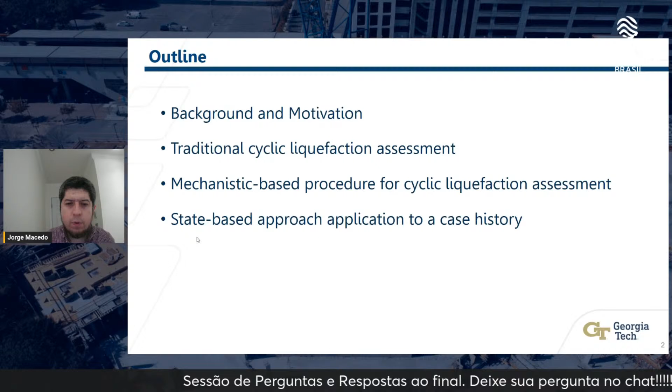So, okay, let's just start with the motivation and with some of the challenges. So one initial challenge is that nowadays, 2024, in the state of practice, the procedures for evaluating static and cyclic liquefaction are contrasting. They are not consistent. So, for example, in Brazil, you had significant failures of tailings storage facilities like Brumadinho, Fundão, and typically those have been associated with static liquefaction, and there is kind of a set of procedures that is used on static liquefaction.

On the other side, on cyclic liquefaction, the procedures are mainly empirical so far. On static they are informed by mechanics, in my opinion. So there is kind of a contrast in terms of how the different assessments are conducted. So that's one initial challenge. Second challenge is that there are limited case histories for intermediate materials. With intermediate materials, I'm talking about, for example, mine tailings or silts. I'm gonna be showing you some figures later that are kind of making a case for that.

So in that context, there is also uncertainty in applying traditional approaches that have been developed for natural soils, in most cases sands and silty sands, to intermediate fine-grained soils or waste materials, for example, mine tailings. What I'm trying to tell you here is that most approaches for cyclic liquefaction have been formulated for clean sands or sands with some fines content, and the application of those approaches to other scenarios for which they have not been explicitly calibrated needs to be considered carefully.

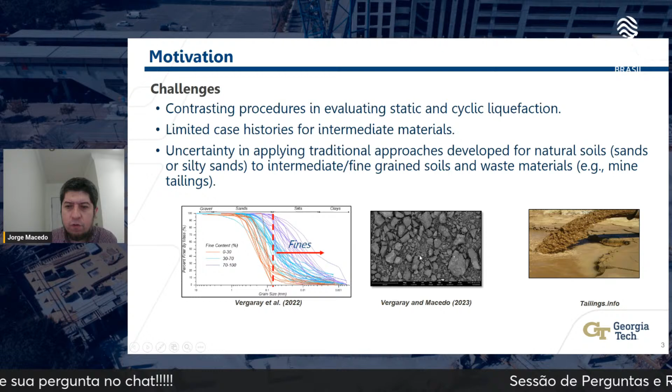So now, let me just show you what is the traditional approach. Please pay attention to this chart over here, and hopefully you can see my mouse. It's an empirical approach where engineers were going to the field after an event, after an earthquake, and there was a documentation of liquefaction manifestation. If liquefaction was observed in the field, typically through ejecta, so if there is a manifestation of the material that was beneath the surface going out to the surface, that was classified as liquefaction, and those are the red points over here. And in the opposite case, where there was no manifestation, it was characterized as no liquefaction, which are the white circles over here.

Now, the y-axis over here is the seismic demand. So this is CSR. It stands for cyclic stress ratio. The equation is over here, as you can see. You can think of that as being directly related to PGA, and it is also scaled by the level of total stresses and effective stresses. And rd is just a depth scaling factor that is accounting for flexibility. Okay, so bottom line, the y-axis is telling you the demand. And the x-axis is telling you the resistance. So how resistant is your material?

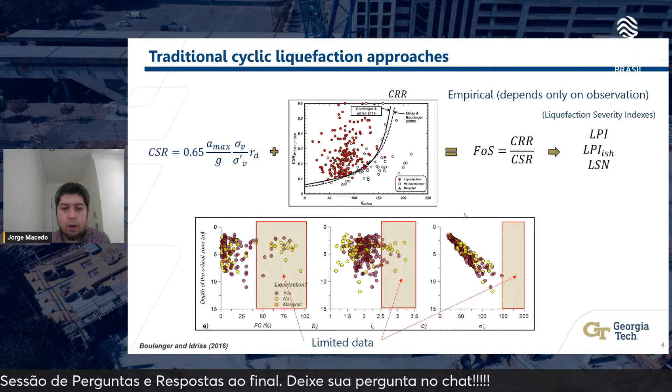So now, in terms of the liquefaction severity indexes, as I mentioned over here, I did show 3 examples. And this is how they are typically calculated. The liquefaction severity index is going to be a combination of the safety factor and a weighting function. And the weighting function is changing with depth. So, for example, LPI is the liquefaction potential index. When it is used, F, this function over here, is going to be nothing but 1 minus the safety factor. And the weighting function is going to be 10 minus 0.5 Z, where Z is depth.

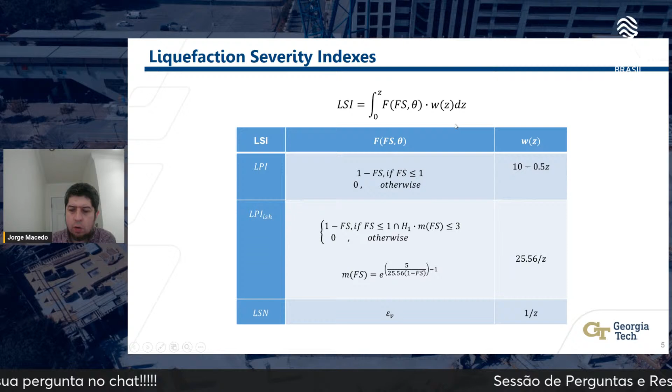So similar to LPI, on LPI-ish, which is relatively newer, you have just a different function for F. And then when you go to LSN, you will be having a different function for F. In that case, this is the volumetric strain. So the concept, as I mentioned, is that you are combining safety factors with a weighting function. That's all that's happening. So now, I'm showing you here a bit more data to keep making the case of the limitations of the empirical approaches.

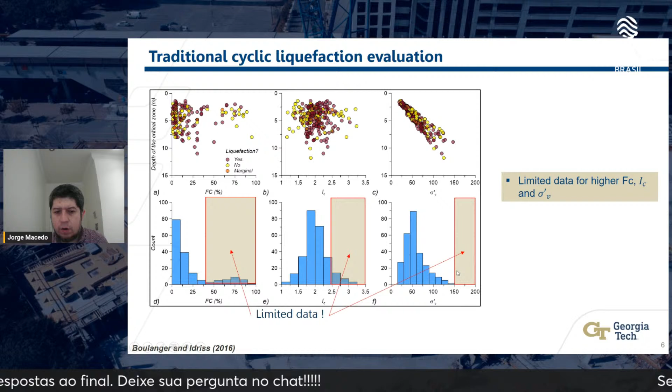Here I'm just showing you the same figure as it was before, but now I'm showing you some histograms. And take a look at the histograms for the large fines contents over here. There are significantly scarce cases compared to lower fines contents. Likewise, when you're looking into I sub C, you see only a handful of cases for I sub C values that are higher than 2.5, and the same for stresses. So same message as in the previous slide. I'm just showing you the distribution with histograms over here.

Now, one approach that we put forward in the papers that I was mentioning, and I'm going to be showing you some of the details in the next slides, is to use a state-based approach. In that state-based approach, the demand, CSR, remember this is just representing the demand, is the cyclic stress ratio. This is not changing. It's exactly the same, as you can see. It's just scaling up PGA, total stresses, effective stresses, and also the rd factor. Now, what we are changing is how to estimate CRR.

And the case that we are making is CRR can be estimated based on the state parameter. And the state parameter can be estimated from mechanistic properties. Like, for example, here I'm showing you the normalized Q, that will be the normalized tip resistance, the normalized BQ, that will be the normalized pore pressure from the CPT, Gmax, that's just the maximum shear modulus that is calculated also from, if you are doing a seismic CPT, you can get that from the seismic CPT.

MTC is just the critical state stress ratio. N is a volumetric coupling, and you can get that from triaxial tests, for instance. Chi is just the state dilatancy scaling. You can get that also from triaxial testing. And then upper gamma and lambda are the slope and the altitude of the critical state line, and P is just confinement. I'll be talking a little bit more about all of that information. But the idea here is that you can estimate CRR from a state.

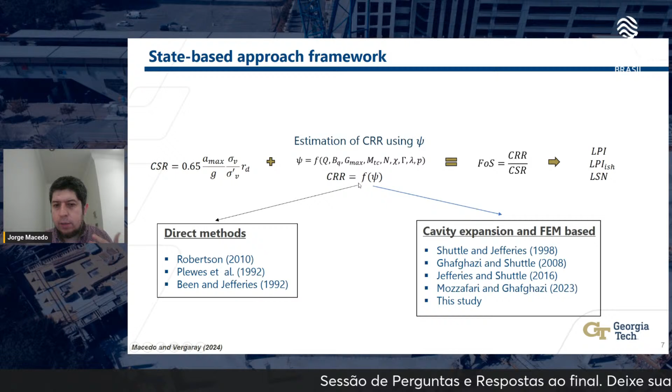At the end of the day, the estimation of the state parameter is posed as an inverse problem. An inverse problem meaning that you go to the field and what you measure with a CPT is going to be the tip resistance and other measurements, and what you really want to know is the state parameter. It's pretty much how you invert the measurement from the CPT into a state parameter. So anyways, once the CRR is calculated, now you can proceed as usual and calculate your safety factor, and you can calculate your severity indexes as well. Okay.

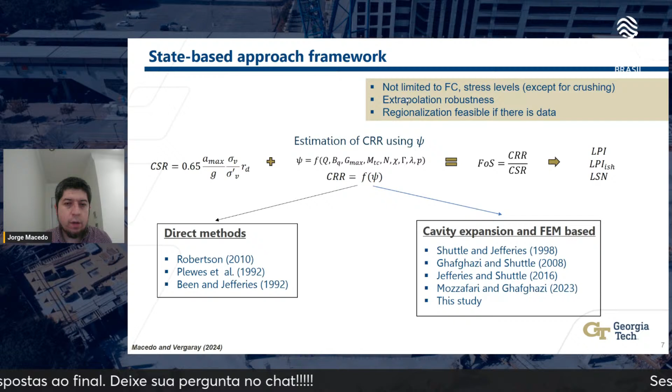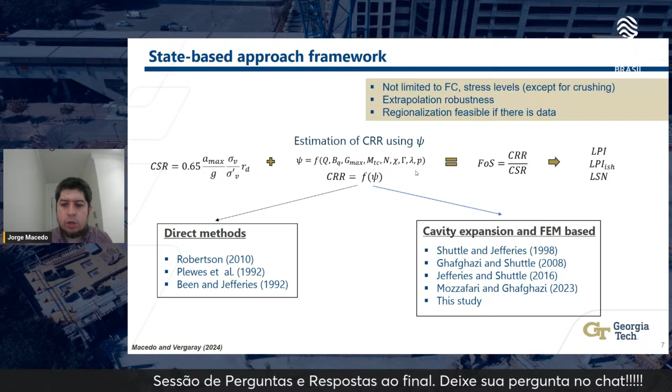So now some clarifications here: this approach is not limited to fines contents and stress level, assuming that we don't have crushing, because we are capturing the mechanistic aspects of the response through the mechanistic parameters that we are using. The extrapolation is expected to be more robust because, again, we are relying on mechanics. It's not just empirical. And you can also have regional versions of the procedure as far as you have data. I will be showing that a little bit more in the next slides.

So now, one of the key aspects of what I have been talking about is the CPT inversion. That means that you go to the field with your CPT, and as I mentioned, you measure the sleeve friction, you measure pore pressures, and you measure tip resistance. But from these measurements, you really want to know a state. You want to figure out what is the state parameter. So there are different ways of doing that. For example, you can do cavity expansion.

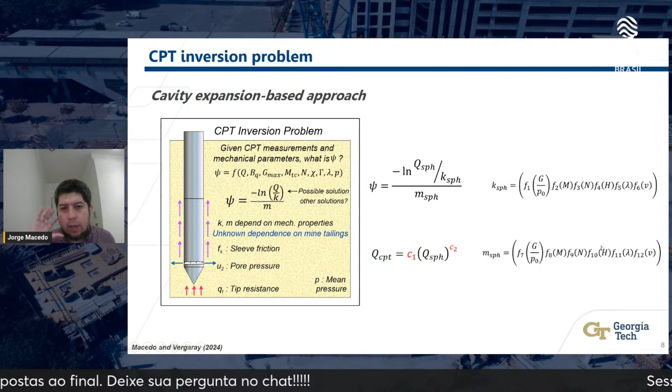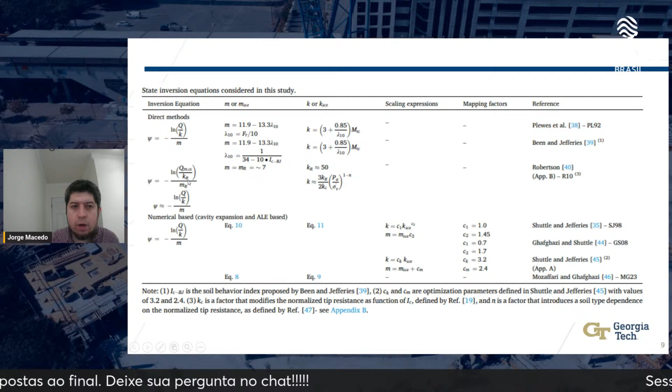Now, in terms of inversion procedures, we document them in our paper. So I suggest you take a look at our paper if you want to see the details. But typically, they are going to have these forms. For example, this one over here is the form for Plewes, Been and Jefferies, and Robertson. And we have some alternative forms. In our paper, we also discuss that the Robertson procedure can also be showcased as an inversion problem, where now the K and M are given by these equations over here.

Now, let's talk about the mechanical parameters, because so far I'm telling you that we are going to be doing a CPT, and we need to back calculate the state from the CPT. For that, we need to have mechanical properties. And those mechanical properties are common, I would say, for static liquefaction assessments. And the case that we are making here is that we can use them for cyclic liquefaction now.

So, for example, the critical state line: you do a set of triaxial tests, and then you evaluate what is the final or ending condition that is representative of a critical state condition, and you can get a critical state out of it. And typically, you can have a linear or a curved relationship; that's more a flavor rather than something really very relevant, I would argue. It depends on the level of stresses you are dealing with, of course. And there are fundamental aspects on why you're getting curvature, but that's a different discussion.

So then you have the stress ratio at critical state, which is nothing but the stress ratio when you are getting to the critical state condition, as the name suggests. You have the state dilatancy parameter, which is just scaling the state with the maximum dilatancy. Remember that if a soil has a more negative state, you are going to have a dilation that is higher. The minus sign here is because of the convention in soil mechanics that expansion is negative, and because of that the dilation is negative. And then you also have stiffness related properties where you have, for example, the shear modulus being related to the confinement through different functions.

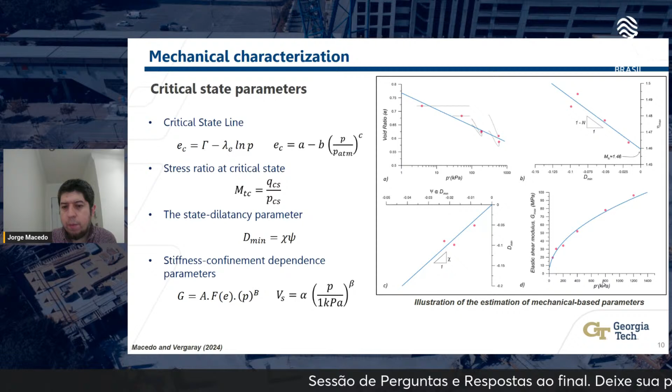So far I have given you the ingredients that we are going to be using, okay? We're going to be using CPT to estimate the state, and to estimate the state, we're going to require mechanical properties. Now, we need a framework to evaluate how well our different models are performing. That can be done using machine learning, and this is what we did. There is a technique in machine learning known as the receiver operating characteristic curve.

And the idea is that, let's say you have these two distributions here, and then there is going to be a threshold to separate the data in one category, where a category can be that liquefaction has manifested, from another category where liquefaction has not manifested. And then, for that threshold, you are going to have some cases that are true positives, in other words, cases where you saw liquefaction and the method is actually classifying that as liquefaction. But you're going to have cases that are false positives, meaning that they are actually in that distribution here, but your threshold is classifying them, I would say, not in the correct category. So you will have true positives, false negatives, and true negatives.

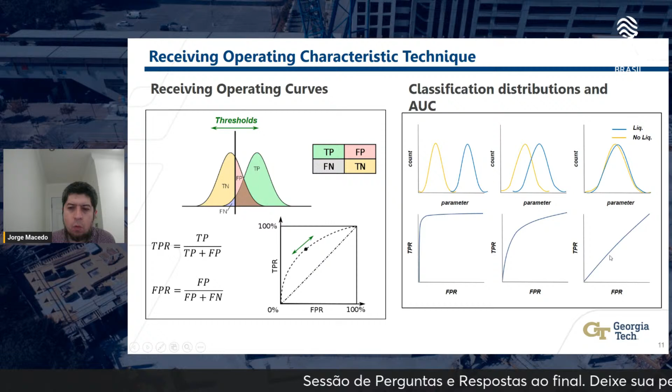And then if you define the true positive rate and the false positive rate, a figure like that can be created where the y-axis is the TPR and the x-axis is the FPR. And if you plot the data here, the closer this curve is to the upper left part, the better your classification threshold is working. So, for example, if your classification is separating two classes like what I'm showing here, hopefully you can see my mouse, that will be a pretty good separation, because we are seeing almost no overlap between them, and this curve is going pretty much to the upper left. Now, if it is doing an okay-ish work, it's going to look like that, and the curve is going to move in that direction. And if it is not able to really separate the cases, the distributions are going to look pretty much the same, and this curve is going to look like a linear one-to-one line, okay?

So now what we have done is to evaluate the framework that I have described using the Canterbury earthquake data. So let me give you a little bit of background on that. During 2010 and 2012 in Christchurch, New Zealand, there was a sequence of earthquakes. And that was quite interesting and quite unusual, because you had a bunch of earthquakes within a relatively short period of time. And in New Zealand, that caused significant liquefaction damage. And because of that, and other aspects as well that I don't have the time to dive into, there were a lot of seismic, and not only seismic, but CPT investigations as well.

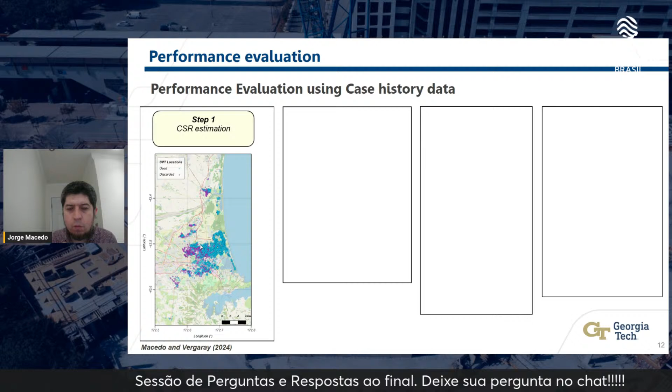Indeed, what you are seeing here on that map, each dot here is a CPT. So you can see that there is a lot of data here. So in order to evaluate the framework that I was describing, we did go to that database and we looked at every single CPT over there, and we decided which ones we're going to be using forward for the assessments that I'm going to be showing.

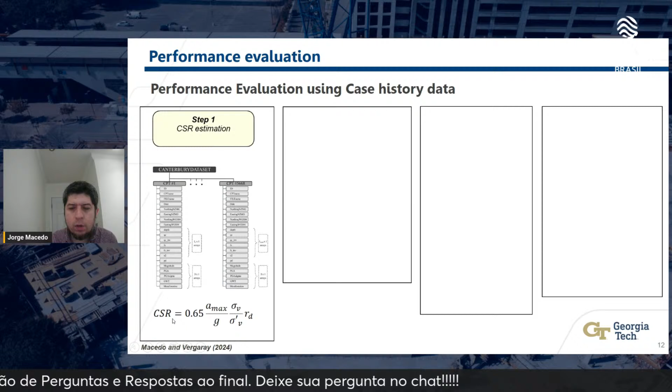Now, what we did is for each site we calculated the safety factor profile, and then we calculated the liquefaction severity indexes as well, which again, remember, is just a combination of the safety factor profile with different weighting factors. And we did that for all CPTs that I was showing on the previous figure. And in that step, we calculated LPI, LPI-ish, and LSN indexes. And then we were getting distributions.

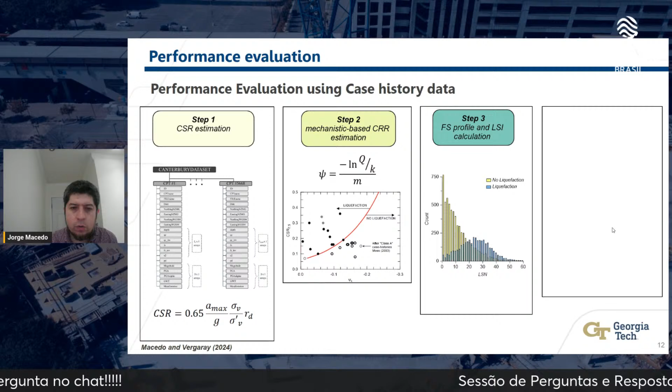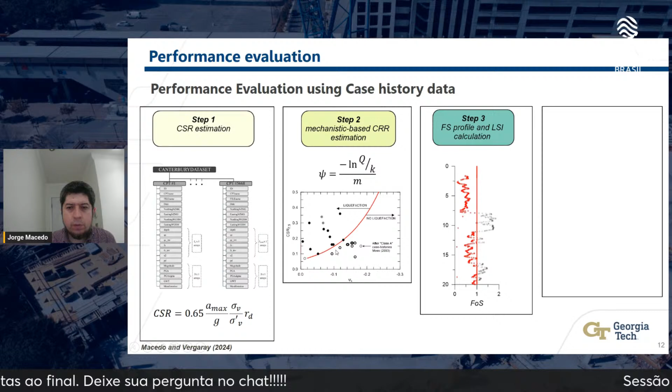So now let me show you some of the results. And remember that we are using a variety of procedures. Just to remind you about that, let me highlight this again. Remember, direct methods, we have this, and cavity expansion ones, we have these ones over here. So now, in terms of direct methods, they were working. Oh, by the way, I am also showing the Boulanger and Idriss 2016 procedure over here, which was used in New Zealand extensively.

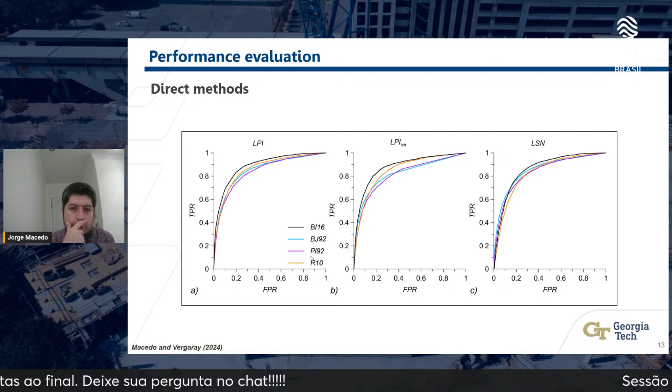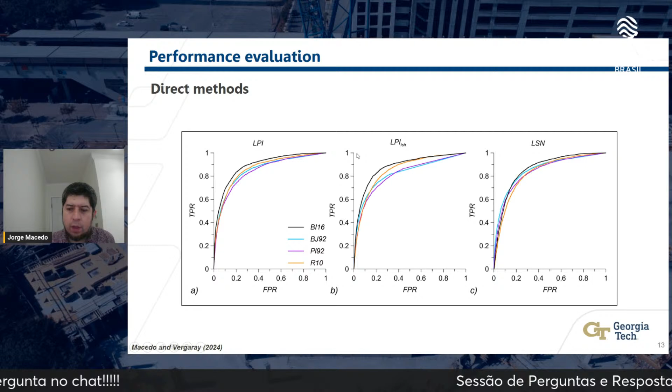And I'm showing you over here the direct methods. Those methods are just estimating a state from the CPT directly, and then we're using a state to estimate CRR. Remember that, okay? So the performance is, I would say, similar in all cases. LPI, LPI-ish, and LSN are just working fine from that perspective, because the curve is relatively close to the upper left range over here.

And now when we looked into the cavity expansion-based procedures, we started to see some differences. For example, here, and again, the Boulanger and Idriss and the Robertson 2010 procedures are shown over here. Those are traditional procedures which are expected to work properly, because those have been calibrated with case histories in New Zealand.

In the other cases, the purple curve over here and this one over here are cavity expansion based approaches, and then the red curve over here, that one is a curve based on finite elements. Okay, so something I should have added over here is that it's not only cavity expansion. Also, we have a curve that is based on finite element simulations.

So the takeaway from these plots over here, remember the better performance is when these curves are going to the upper left. So the takeaway is that the cavity expansion procedures, in terms of performance, are not as good as the others, as you can see, because those are closer to the diagonal. And in particular, this curve over here, which is from Shuttle and Jefferies, was not really performing well on New Zealand.

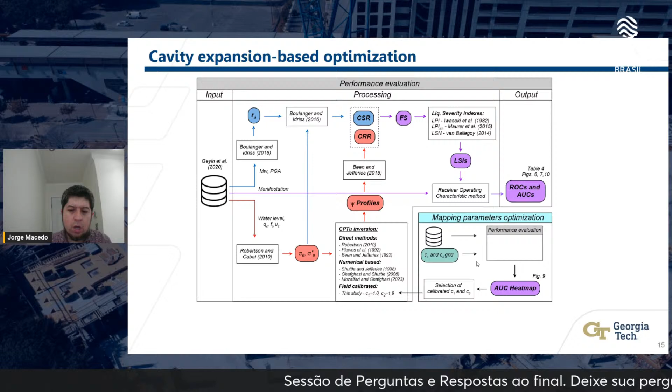And for one of them, that is the cavity expansion, we tried out different C1 and C2 values. And remember, C1 and C2 are the constants that are mapping the state parameter that you are getting from cavity expansion into a field-based state parameter. So we conducted a sensitivity study, changing those C1 and C2 values to different realizations to create a map that's going to look like that.

And we created maps for different liquefaction severity indexes, starting with LPI, moving into LPIish, and then going into LSN. And what you are seeing here, the x-axis is C1, and the y-axis is C2. And remember that those factors, C1 and C2, are used to scale the state parameter that you get from the cavity expansion simulations into field values.

Something else that you are seeing over here is the sensitivity of different combinations of C1 and C2. For example, the top figure over here is showing a C1 of 0.1, and how the different cases are changing when you increase the C1 for a constant C2 value. And the different histograms are showing how well the calibrated parameters can separate liquefaction from non-liquefaction. So we repeated that many times, and we created those contours over here.

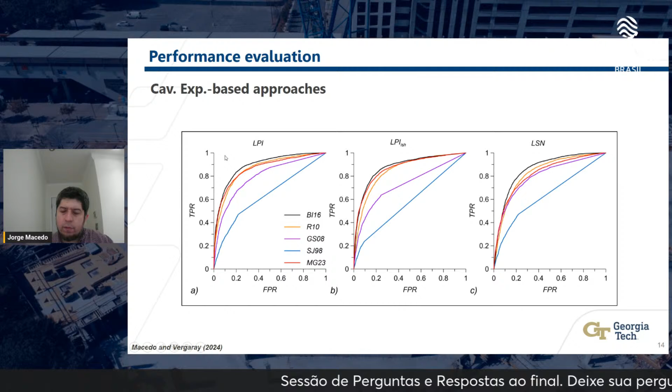And what you are seeing here as colors is the area under the curve, which is, if I go back here, the area under those curves. So if those curves are closer to the upper left part, the area will be higher, and the method will be performing better. So what we are going after here is pretty much the highest values here.

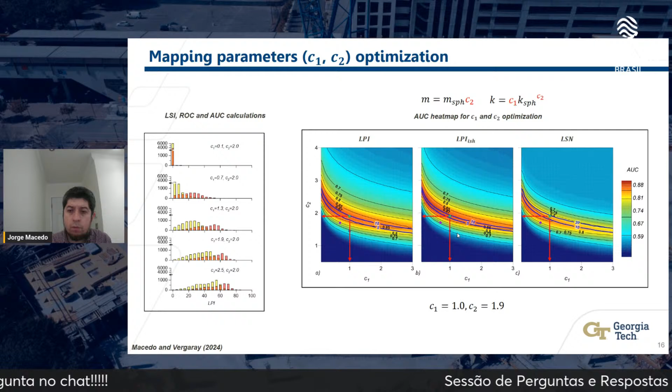And in that particular case, we found that this combination was providing us a high AUC value, and by the same token, it was giving us an LPI value that is consistent. Here, for example, we are in the range between 5 and 15. It's consistent with values that have been observed in the field, which is good. So we did the same for the other cases, and in that manner we constrained our C1 and C2 values. And for those constrained values, we repeated the procedure and calculated the receiver operating curves.

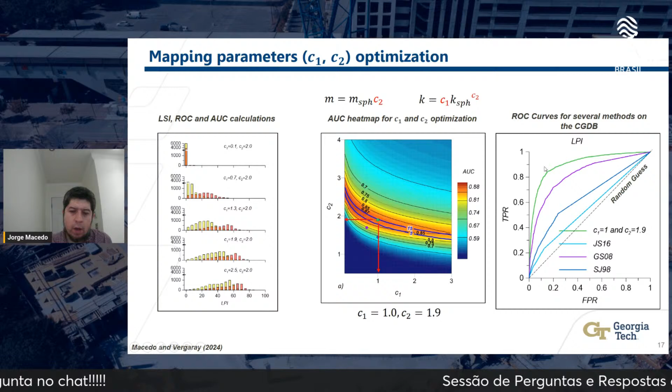That's what we are kind of going after. And then, we compared over here how our updated inversion procedure, or cavity expansion-based inversion procedure, was working in the context of the Boulanger and Idriss 2016 and the Robertson 2010 procedure, which have been formulated for natural soils. I have to highlight that. And I'm showing you also this procedure here that is based on finite element simulations as well.

The reason why we're showing that procedure here is because when you have a cone penetrating, cavity expansion is going to be only a proxy for the penetration. If you're doing finite elements, that's going to be a better proxy. Of course, it is still having limitations as well.

So the takeaway from this is that the proposed framework is as robust as the Boulanger and Idriss procedure for New Zealand. However, the mechanistic framework can be extrapolated to different conditions that we believe the Boulanger and Idriss procedure has not been formulated for. For example, cases that are outside the database, and that would apply to any empirical procedure in general, because an empirical procedure is based on the data for which it has been created.

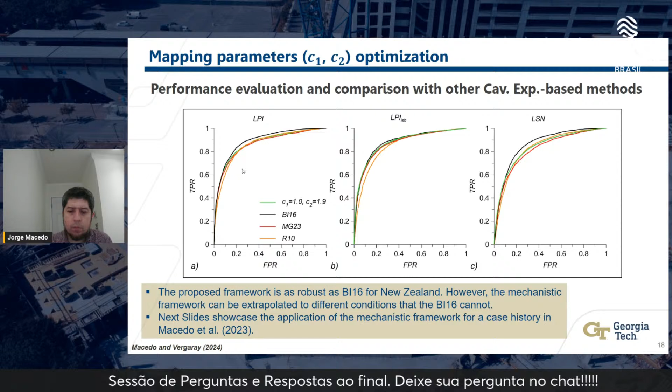So in that context, in the paper, and in the case of New Zealand, we were not recommending those procedures over here. We were favoring either the procedure based on finite elements or the procedure we recommended to be used, which is a calibrated cavity expansion. And of course, the empirical procedures are working also fine in New Zealand, because to some extent, they have been calibrated with significant data from New Zealand. And the same story applies for the other liquefaction severity indexes.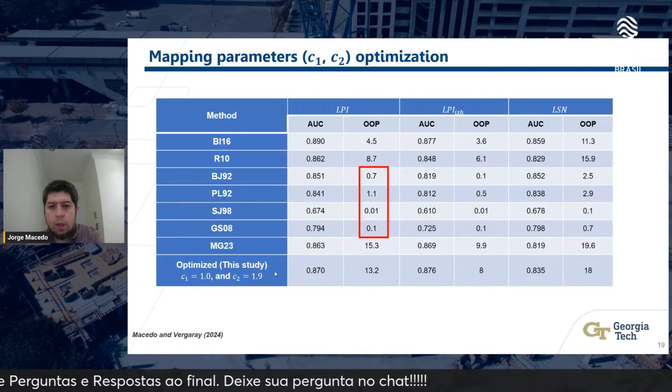With the added value that you could actually use the procedure for a site-specific case study. For instance, if you have a tailings dam where you are assessing cyclic liquefaction and you have already done the testing for static liquefaction assessment, you can use that information for the assessment of your particular facility without relying on a procedure that has been formulated in a general way using data from many, many locations.

Now, we applied the procedure to a case history in California, the Harbor Bay Business Park liquefaction case history. And this is a very nice case history. It is published in one of our journal papers. And I'm saying that it is nice because we had CPT data before the earthquake and also after the earthquake.

And we have CPT data since approximately 1984, and CPT data has been collected periodically over there. So we have data from 1984 to about 2019. So that is more than 30 years of data approximately, if I'm doing the math correctly. So we did look into all of the data, and we learned a lot of things.

For example, how the earthquake is actually changing the density of the materials that you have there, and many other things. So just to give you a general idea of the stratigraphy on that site, the CPT traces look like that. This is the tip resistance, this is the pore pressure, this is the normalized pore pressure, this is the friction ratio, and this is the undrained strength.

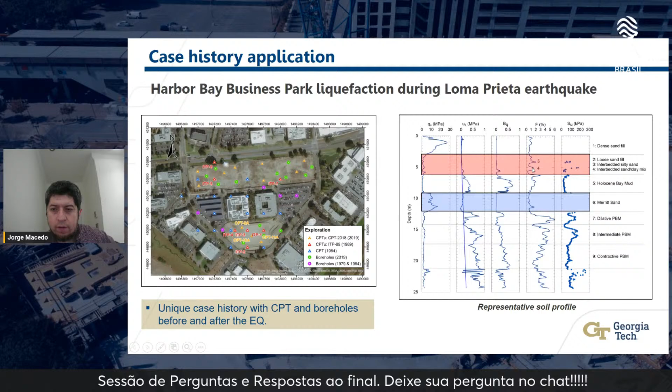So as you can see, there is a dense sand fill over here, which is followed by a loose sand fill and interbedded silty sand, and also interbedded sand-clay mix over here. You have a Holocene Bay Mud over here. There is the Merritt sand here. There is a dilative Pleistocene Bay Mud that is showing up over here with some variations. So in general, we focus on these two units for our assessments.

And here I'm showing you some comparisons of CPT responses before and after the Loma Prieta earthquake. The Loma Prieta earthquake happened in 1989, and as you can see here, it seems that there was a movement from left to right for that particular material, the loose sand fill over here. Meaning that after the earthquake, the tip resistance seems to have changed by that amount over here.

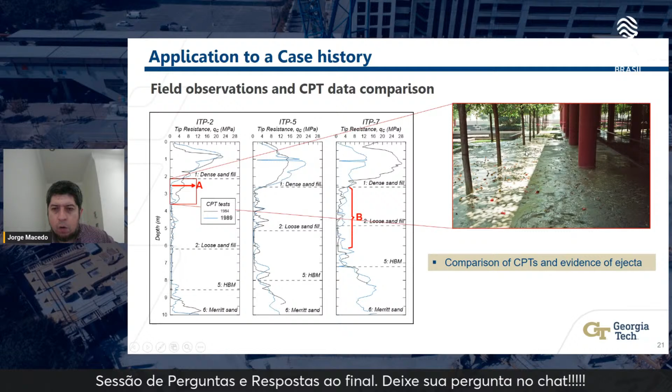But that is not really a general statement, because in some other cases we were seeing different variations. So it's really a complex problem to see how the resistance of a particular soil profile is changing before and after the earthquake. We also had evidence of ejecta over there, which we used for our interpretations.

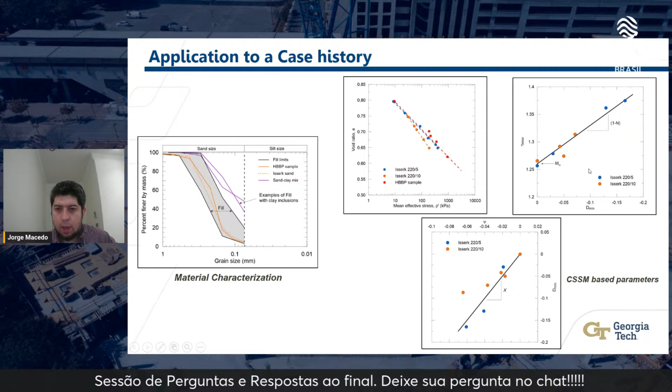And something that we did is to conduct triaxial testing with samples that were recovered from the site. This is the HBBP sample. And with that triaxial testing, we calculated our properties, for example, the critical state line, or the state dilatancy parameter, or N, the volumetric coupling. And we use all of that.

One of the things that we did was to calibrate the Plewes inversion procedure for our site, because the Plewes procedure, when you have a normalized friction ratio that is low, tends to give high values for the CPT inversion K coefficient. So based on our triaxial tests and the calibration of K and M using cavity expansion, we modified this trend over here, and we propose the green trend over there.

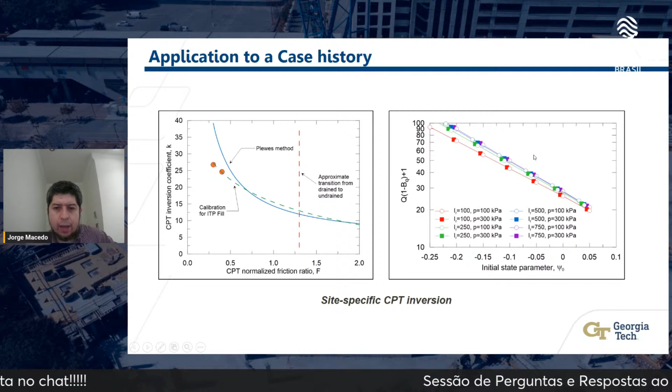And then we used that also to have an approximate transition from drained to undrained behavior, informed by the cavity expansion simulations that were conducted over here. And here you can see CPT charts with the different variations for different units, going from the dense material on the top to other variations, for example, silt-contaminated hydraulic fill materials that are contractive, or hydraulic fill materials that are lightly dilatant. This is just for some of the locations.

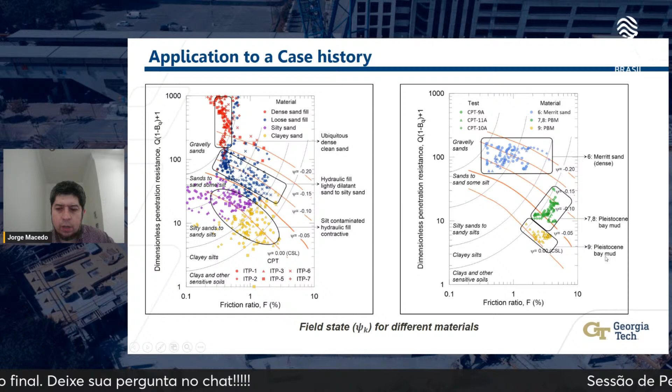And here you have more specific units like the Merritt sand that I was talking about before, and the Pleistocene Bay Mud, and another unit of the Pleistocene Bay Mud. Something else we had was the ground motion recording, and from it we were able to inspect when liquefaction was happening. You can see the frequency content here changing dramatically. These waves were happening very often, and now they are lagged in time and happening less frequently. That's associated with liquefaction.

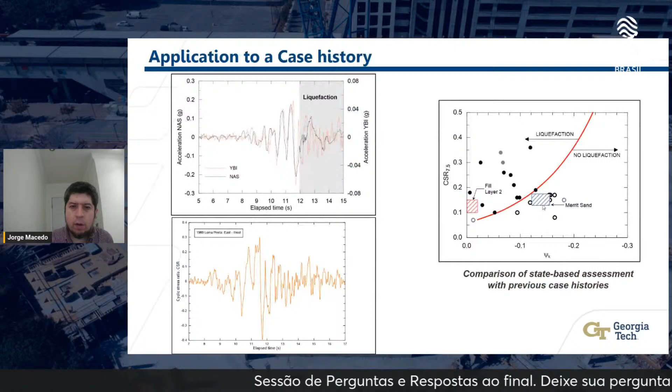This is the acceleration. We transform the acceleration into the cyclic stress ratio, and based on the cyclic stress ratio, we estimated our demand. Then, based on the cavity expansion simulations and the CPTs, we estimated our state parameter. For the two units we considered, we had liquefaction in one case and no liquefaction in the other. That's just a way to combine the information of mechanistic parameters to assess liquefaction.

So in terms of closing remarks, first of all, I want to highlight again that there are contrasting procedures used in the assessment of static and cyclic liquefaction these days. In my view, there is not really a need to have that contrast. I think we should be using mechanics as much as possible to inform our assessments. And that's my view.

Then, a critical state soil mechanics-based framework that is addressing the limitations of semi-empirical procedures for assessing cyclic liquefaction has been discussed. And in terms of limitations, I'm mainly referring to the fact that when you have an empirical-based calibrated procedure, it's going to be working fine for your data. Nothing is assuring that that's going to be working fine outside your data.

The framework that we proposed was assessed using a large CPTU database. That was the New Zealand database that is having, I believe from the top of my head, like 5,000 CPTs or something like that. And then we use all of that with machine learning concepts to really rank and assess different options to assess

liquefaction manifestation. So in particular, the performance of the CPTU-based inversion procedure was assessed, and we provided recommendations into updating the cavity expansion-based procedures to do that. And that's one of the key contributions of the paper. And last, I just illustrated the application of the framework to a case history on the Loma Prieta earthquake.

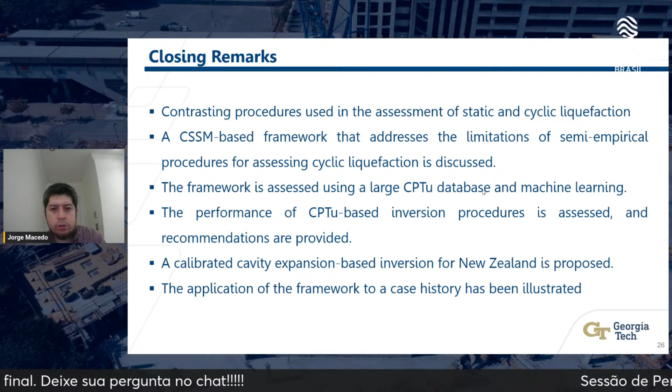So far, we haven't received any questions. So if you don't mind, I'd like to start with one of my own. Sure. Again, as I mentioned, an outstanding presentation. Thank you very much for bringing this topic to the Brazilian geotechnical community.

I thought it was extremely interesting the way you've used machine learning to distinguish the variables you were dealing with. You mentioned the receiver operating characteristic technique. I wonder if you've tried any other algorithms, and what were your main deciding factors for using this algorithm in particular?

Yes, I would say it's a useful technique. When you have a classification method, it's just a useful technique to rank different procedures. There are other techniques that could be used as well, but our focus was not really trying to push different data-driven techniques, but trying to really make the case that the knowledge that we use for static liquefaction assessments can be also used in cyclic liquefaction assessments.